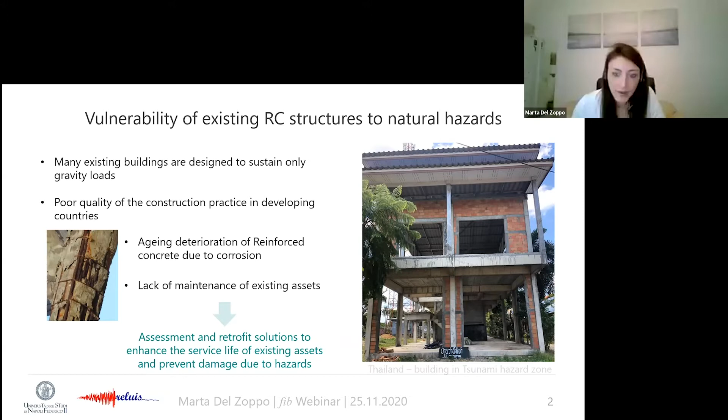In general, natural hazards become disasters when there are human life losses. If we look at the latest reports of the United Nations Office for Disaster Risk Reduction, we see a significant increase in the frequency of natural disasters and related human losses and economic losses. These numbers are almost doubled with respect to the previous period, an increasing rate that is worrying.

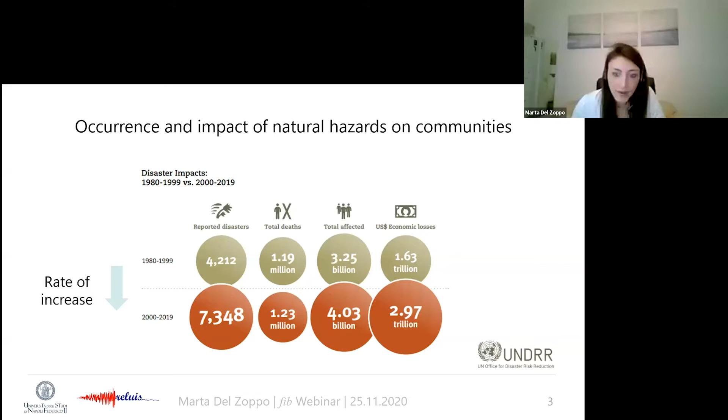The frequency of this kind of event is going to increase. The last example we saw a few weeks ago in Turkey, with a 6.6 magnitude earthquake followed by tsunami, a coastal flooding with a maximum elevation of 1.9 meters. These kinds of events are going to happen, and our structures are not completely safe from such events, because several losses occur during these disasters.

We also live in a historical period of fast changes caused by climate change, as previous speakers were also saying. Climate change is increasing the vulnerability of our structures and also the exposure to natural hazards because of increasing rates of disasters or events like hurricanes, cyclones, storm surges, and tsunami.

The global warming that is causing sea level rise will also increase the risk of coastal flooding due to storm surges and tsunami. This, combined with increasing carbon dioxide concentration in our atmosphere, higher temperature, and higher humidity, will also increase the rate of corrosion of our existing reinforced concrete structures, and so increase their vulnerability in general to these risks.

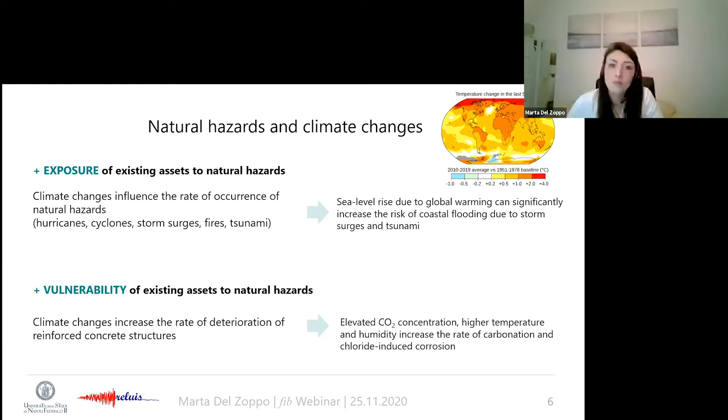In addition to natural hazards, we need also to consider that we have many induced hazards. One of the most famous examples is the Groningen gas field, where there is a phenomenon of induced seismicity in that area given by the gas extraction.

Another example is about the potential induced seismicity and tsunami triggered by offshore activities near seismogenic faults. This was the objective of the SPOT project in Italy, where several spot areas were identified along the Italian coast - areas at potential risk of earthquakes and tsunami due to offshore activities.

In general, we need to define a life cycle procedure for assessment and retrofit of existing structures, looking for single and multiple hazards. During the assessment, we need to consider the degradation of materials that can occur during the life cycle, given by corrosion for instance. A proper assessment of the behavior, performance, and damage of the structure will allow for good design of retrofit intervention, prioritization of intervention from a risk perspective, and retrofit strategies that extend the service life of our structures.

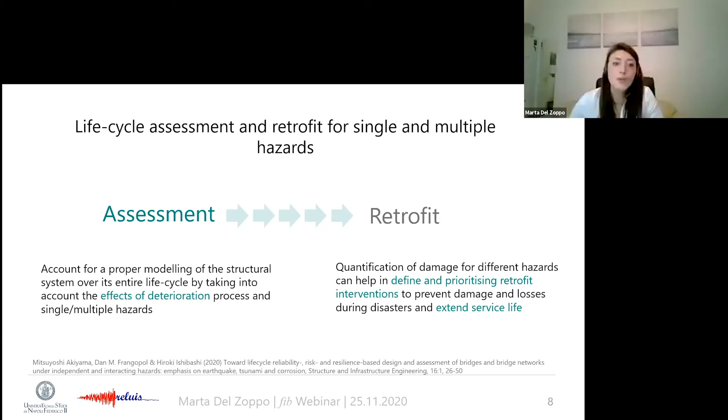In this context, there are two pillars we need to consider: resilience and sustainability. Resilience of our communities to natural hazards is paramount to guarantee that our communities, focusing on the physical part of the community, meaning buildings and structures, are able to recover after the event.

We need to avoid damage and allow the full recovery of activities in the shortest time possible. We also need to consider the sustainability of the intervention. If there's need to recover the original damaged buildings, we need a sustainable approach, considering the sustainability of materials adopted, and the management of debris, which can become a real issue in such conditions.

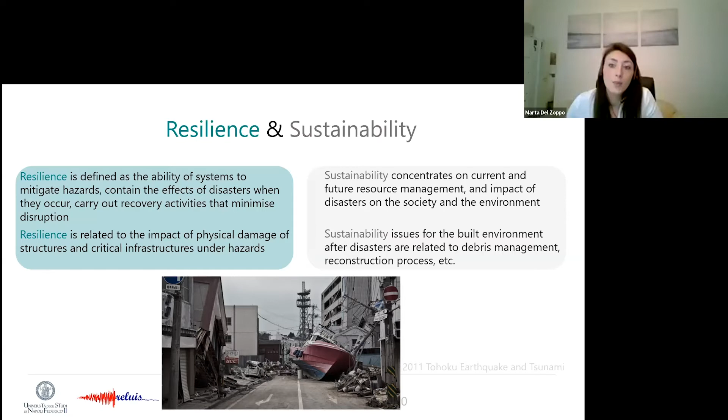Among other hazards, earthquakes are the most frequent, as seen from the United Nations report, and are the most dangerous for the built environment, for structures. But the major concern is that earthquakes can be a trigger for many other hazards, such as landslide, fault displacement, and tsunami, which we have seen are more destructive for both the built environment and human lives. I will focus on these two in the rest of this presentation.

Seismic hazard and earthquake engineering in general are very well developed and quite well understood nowadays, while other kinds of hazards are less investigated and can represent a major threat for our communities and built environment. In the field of seismic assessment, experience acquired in the aftermath of previous earthquakes allows us to be aware of the critical deficiencies of our existing reinforced concrete structures during earthquakes, even of moderate intensity.

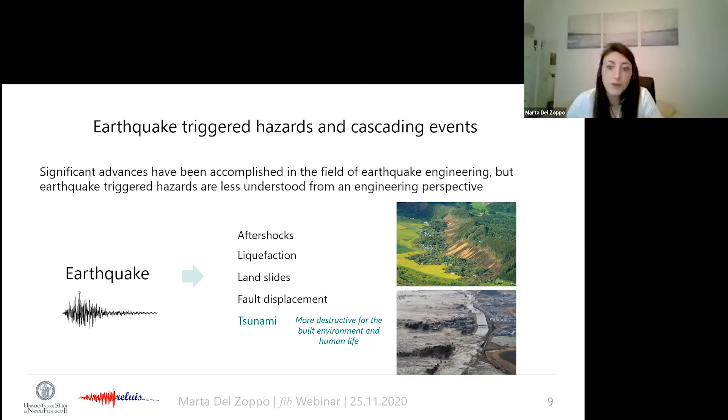In terms of damage to structural components, the most critical parts are related to beam column joints, but also to the lack of detailing, which translates into low shear capacity and limited ductility of beams and columns, among many other problems related to shear walls and other structural elements.

Damage is also concentrated in non-structural components, which are the major cause of economic losses after earthquakes of minor intensity. It can also be a threat to human life, especially when cladding can overturn during earthquakes and become a danger.

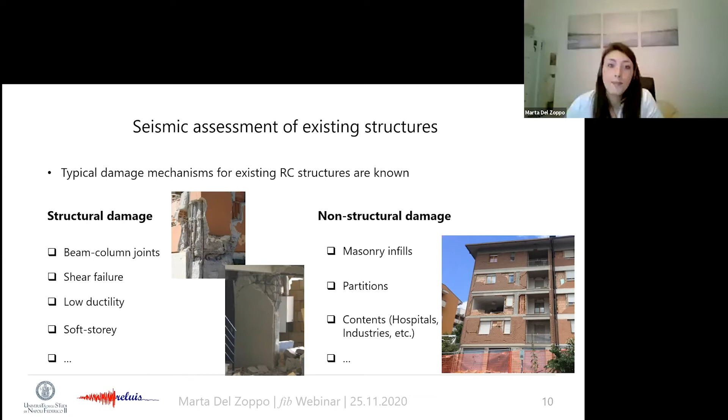We know so many things about earthquakes and how structures respond to such events, and we have several tools to predict with good accuracy the behavior of structures when subjected to earthquakes. But what about tsunami? Tsunami engineering is a quite brand new, relatively recent field of research, and the knowledge about the behavior of structures under this kind of hazard is quite low.

When we approach other kinds of hazards different from earthquakes, we need to consider that the performance of structures can be completely different in fundamentals, so we need to start basically from the beginning. Tsunamis are a sequence of waves characterized by a very long wavelength period, typically ranging between 20 and 40 minutes.

After the first phase of impulsive bore, the tsunami flow becomes similar to a quasi-steady flow. Under this kind of quasi-steady and long duration load, the behavior of structures is not dynamic. This kind of external loading does not excite the dynamic response of a structure, given the difference in fundamental periods. So the behavior and performance of structures subjected to tsunami is static in nature, monotonic under the inflow inundation, and controlled by the lateral force given by the tsunami on the single structure or building.

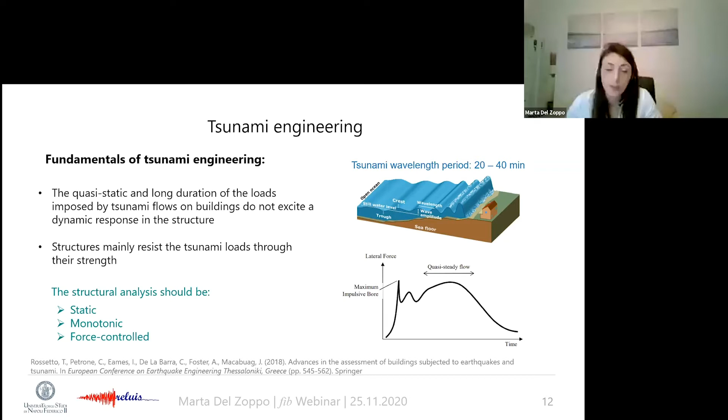To understand more about the behavior and performance of structures during a tsunami, we can start by analyzing the effects induced by previous tsunamis on structures. In general, tsunamis are very complex phenomena that induce several kinds of loads and effects on structures.

We have lateral loads given by hydrostatic and hydrodynamic pressure that may have higher magnitude at the lower stories of a building. These loads cause failure modes in terms of mechanisms, like development of plastic hinges at the columns of the ground story level, but can also cause shear failures locally on ground story columns, and of course damage to masonry infill walls and partitions.

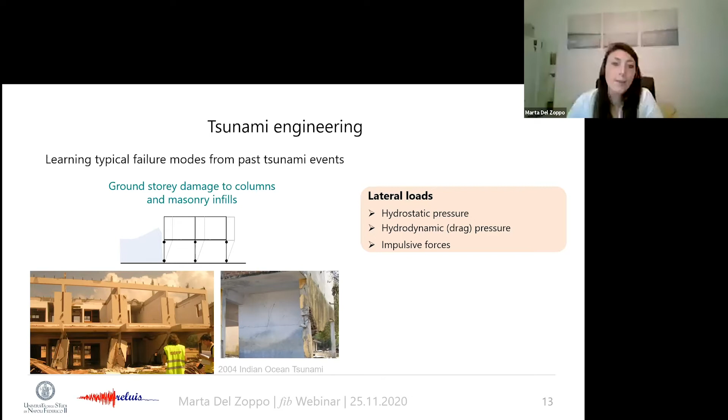But tsunamis also induce vertical loads in the form of uplift loads due to buoyancy of the enclosed space submerged in the fluid, because we are talking about this flow of seawater, and buildings that are impermeable or with very small openings can be affected by buoyancy on the foundation caused by this large enclosed space inside the building. This kind of effect can lead to a failure mode like global overturning of the structure, especially when shallow foundations are adopted.

This was the failure mode typically observed in Japan during the 2011 Tohoku earthquake and tsunami, because of the traditional construction technique in Japan, where they use as structural components exterior claddings made by lightly reinforced concrete walls. So basically the structures were like boxes, reinforced concrete boxes, submerged in the tsunami flow, and then they overturned in many circumstances.

Other effects related to tsunami are also caused by the soil. This phenomenon is called scour, which is soil erosion below the foundation of the building, causing local loss of support of the column, which can be a trigger for partial collapse of the structure.

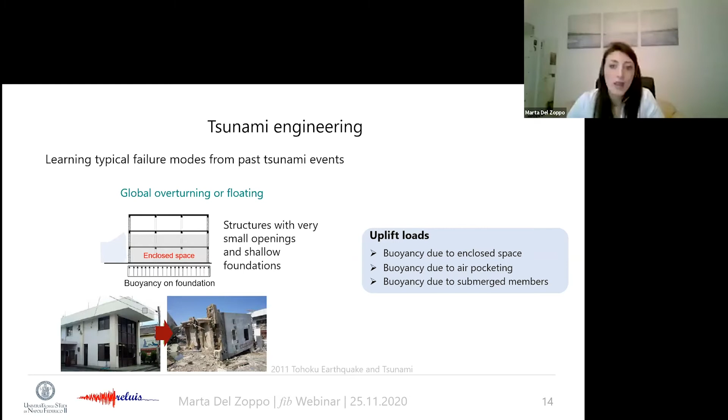And also the impact with floating debris. Several debris are transported by the seawater, especially near seaports, but in general, ship containers can be transported by the water and can cause significant damage to structural elements, and also in this case lead to local failures.

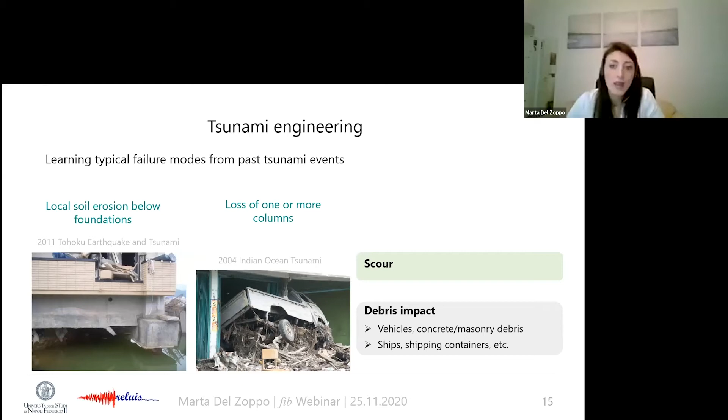So based on the lessons learned from past mega tsunamis, a performance-based assessment methodology has been developed for this kind of hazard. Starting from a hazard map, we can assess which kinds of loads are acting on a structure, and then define which is the predominant failure mode for the building.

Of course, in this assessment procedure, we also need to consider the effect of pre-existing damage due to corrosion, always looking at the entire life cycle of the structure, damage occurred by preceding earthquakes in the case that the tsunami is triggered by a previous seismic event, and also whether any kind of retrofit intervention has already been applied to the structure to prevent seismic damage.

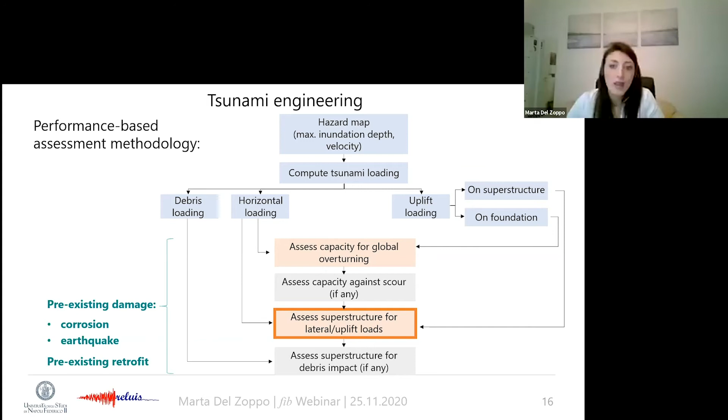Next, I will focus on this structural typology that is very widespread in the Mediterranean region, but also in many other countries in the world: reinforced concrete frame structures with unconfined masonry infill walls.

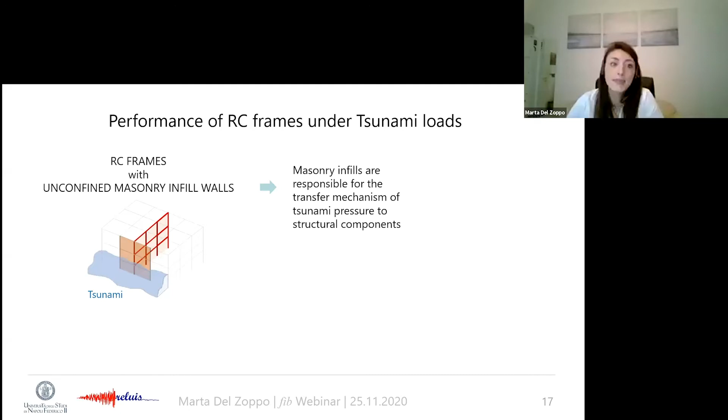These kinds of structures, when subjected to tsunami, have their response and load transmission mainly governed by the exterior claddings, which in this case are made by masonry infill walls. But under such out-of-plane loads, the lateral pressure induced by tsunami on these masonry infill walls will cause the out-of-plane failure of such systems.

So this kind of wall is called a tsunami breakaway wall, because it will collapse very soon during the tsunami inundation, allowing the water to pass inside the building.

And for this kind of structural typology, we developed a structural analysis methodology. Given the fundamental difference between tsunami engineering and earthquake engineering, we need specific structural analysis methodology to design and assess the performance of structures during this kind of hazard.

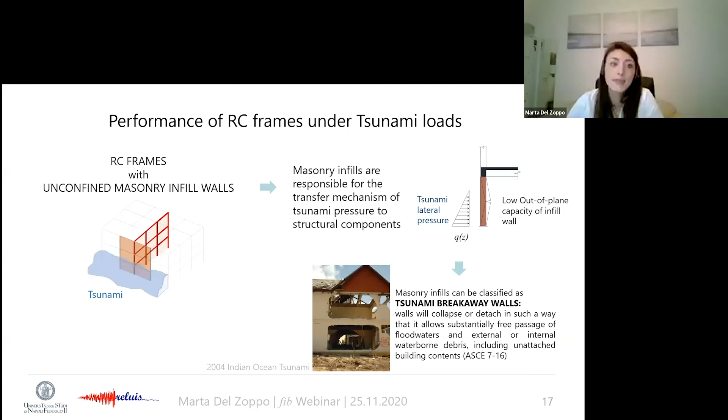In the context of tsunami engineering, the main methodology is the variable depth pushover analysis, the VDPO analysis, which has been developed by Petrone et al. in 2017 and is now adopted by the American Design Code for tsunami evacuation buildings.

This methodology has been further improved in recent years in our recent collaborations to include also the effect of breakaway infill walls and also the effect of uplift loads on structures. So basically, the variable depth pushover analysis for breakaway infill frames, the VDPO-BI analysis, is a nonlinear static pushover analysis that considers, step by step, an incremental increase of tsunami inundation depth.

By increasing the inundation depth, analysis will consider the progressive damage of non-structural components, so the failure of infill walls, for instance, under the lateral pressure of the tsunami, and will apply to structural elements, both vertical and horizontal components of the structure, the actual distribution of loads caused by the tsunami.

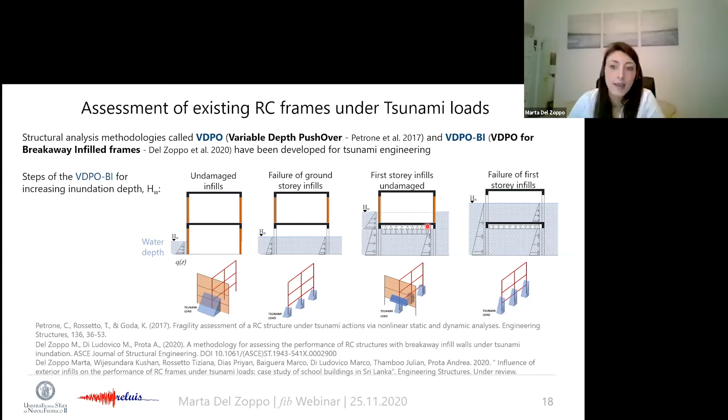Now we see an application of the VDPO analysis, VDPO-BI analysis, for a three-story frame. We want to assess the capacity of this structure, assuming that the tsunami demand at the building location is known.

So we know which tsunami force is expected at the building site and also the maximum inundation depth. Thanks to the VDPO-BI analysis, we can define the capacity curve for the structure, like we do during seismic assessment, assess the damage to structural and non-structural components during the inundation, and also check if the structure is able or not to sustain the tsunami demand at the specific location, given this specific kind of tsunami inundation scenario.

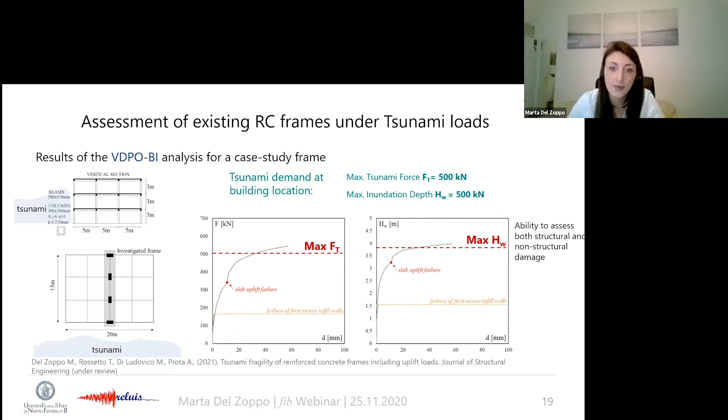When we have a methodology and tools to perform a refined assessment of the performance of structures, then we are able to design retrofit interventions that can avoid the damage of such structures, in the optic of sustainability.

Sometimes retrofit is not a viable choice, and we don't have any other alternative except demolition and reconstruction. But in the perspective of sustainability, we always try to reuse existing structures and adapt their performance to our current standards.

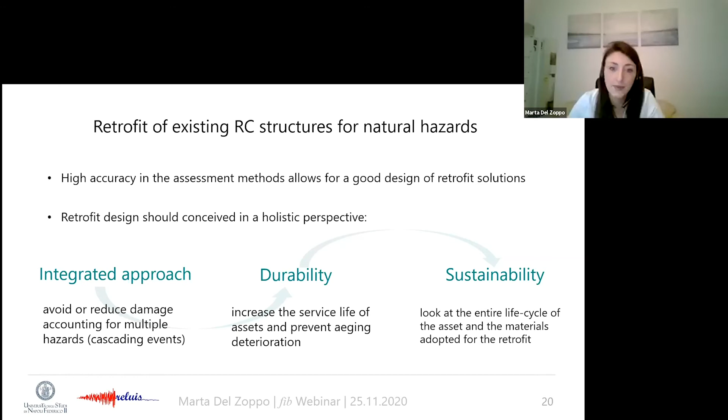Retrofit systems for reinforced concrete existing structures address a lot of different structural needs, and most of them are very well known in construction practice, and their effectiveness has been proved and well assessed, including by past events.

Like this picture taken after the Central Italy earthquake in 2016, where we can see the effectiveness of the FRP strengthening of this part of the building that is still standing after the earthquake.

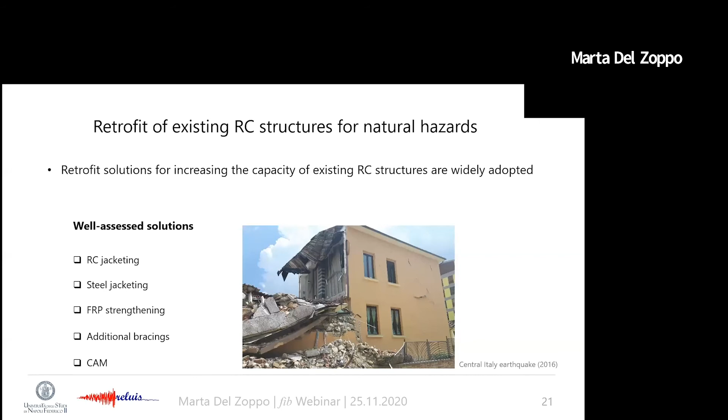Research is also currently focusing on developing new technologies that, other than responding to the safety level by increasing the capacity of members, also look at other aspects of durability and sustainability.

In this perspective, we are working on the adoption, for instance, of inorganic composite materials that can sometimes be more sustainable given the low amount of polymers inside the matrix, like high and ultra high performance fiber reinforced cement composites.

In this case, I will not say much more on this aspect because I already discussed this technology during a previous FIB webinar that you can now find on the YouTube channel of FIB.

And there are also other kinds of retrofit solutions with inorganic composite materials, like FRCM technology, TRM, and so on. And we have also a new trend.

New research is now looking at the adoption of smart materials, like, for instance, shape memory alloys for strengthening and retrofitting existing structures. We had a webinar on this topic a couple of weeks ago, so if you're interested, you will find the video on the YouTube channel in a couple of weeks.

Seismic retrofit solutions are well known, and they are used both for increasing the capacity of structural components like beams, columns, shear walls, and beam-column joints, using different solutions and technologies.

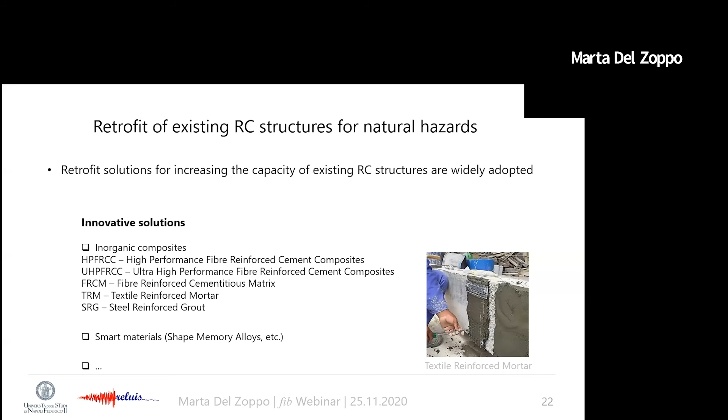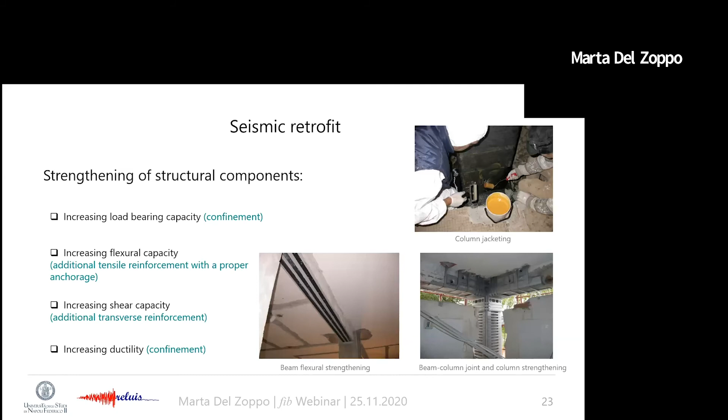They are also adopted commonly for preventing damage to non-structural components, so strengthening infill walls both in their in-plane direction and also to prevent out-of-plane overturning failure, which also avoids danger for human lives.

Retrofit solutions for other kinds of hazards are less investigated, less known, but definitely we can say that they can exist, and we are working on this too now, looking at extending the perspective of retrofit also to other kinds of hazards.

When we talk about tsunami, the current and most diffused approach is a large scale countermeasure against tsunami. It consists of adopting physical barriers like seawalls or mangroves that dissipate the energy of the tsunami offshore, decreasing the velocity of the inundation depth and flow when it arrives on shore, making it less destructive when it reaches coastal communities.

But retrofit solutions at the single building level can also be developed and tailored.

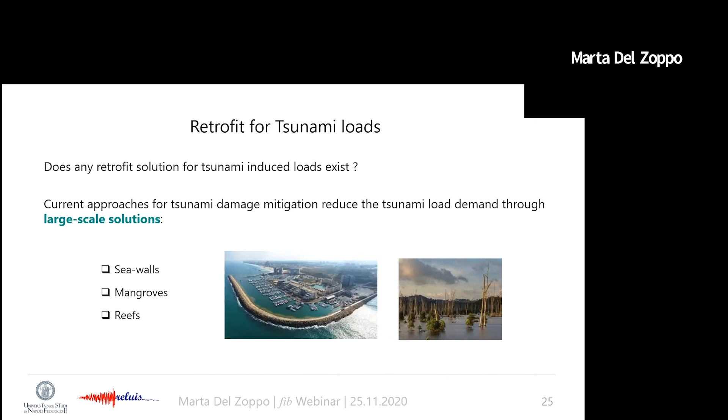Of course, the adoption of retrofit solutions can definitely be adopted for critical infrastructures like hospitals, for instance, or for buildings that can be adopted as tsunami vertical shelters, and also, of course, for those buildings that can be considered as having cultural heritage value and so need to be saved for future generations.

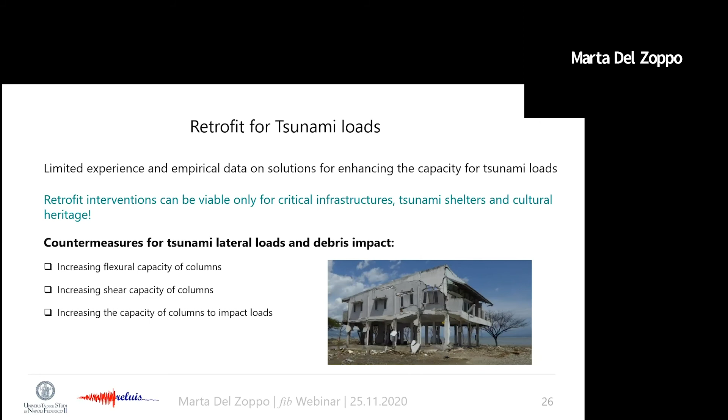So here are some examples of which kind of intervention can be needed for tsunami loads. We can strengthen the columns and the elements at the ground story level to avoid damage from lateral loading and from debris. But we can also think of systems to avoid damage caused by buoyancy, in this case with breakaway slab systems, for instance, or with the adoption of deep foundations, so to avoid the effect of overturning observed in previous tsunamis.

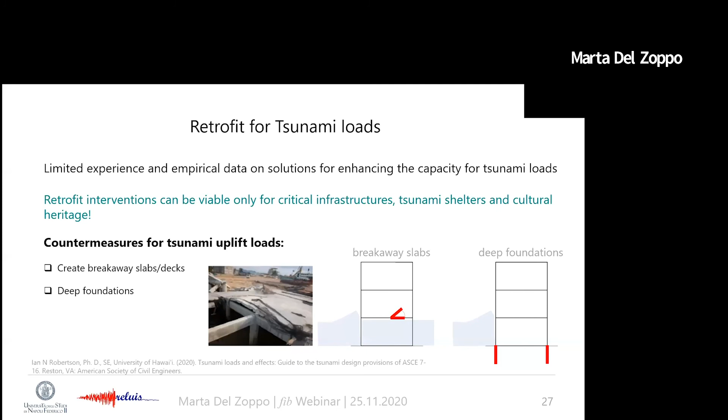And also intervention on the foundation can be helpful in the case of damage due to scour, so preventing soil erosion or avoiding local collapses, also increasing the redundancy of the structure when it is possible.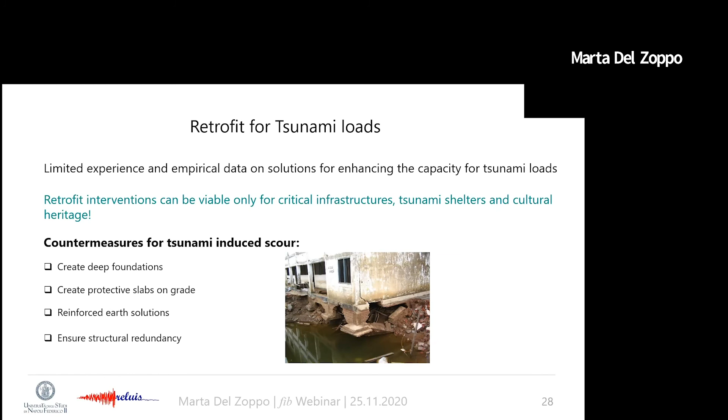In general, when we design retrofit solutions, we also need to think of the effect that kind of retrofit solution will have on sequential events. So in the case of earthquake followed by tsunami, we need to consider that any kind of intervention that we do for seismic strengthening will affect also the response under tsunami.

And this is an example, for instance, of a bridge that was strengthened to resist earthquakes. The piers were jacketed in this case, and after the 2011 tsunami, the pier was completely undamaged. So basically, this strengthening solution designed as a seismic intervention actually helped also during the tsunami event. And also the use of jackets with materials that can enhance durability will be helpful during a tsunami.

Because, of course, if you consider reinforced concrete members that will be completely submerged in seawater, they will be subjected to a faster rate of corrosion and degradation caused by this stronger attack of chlorides given by the seawater.

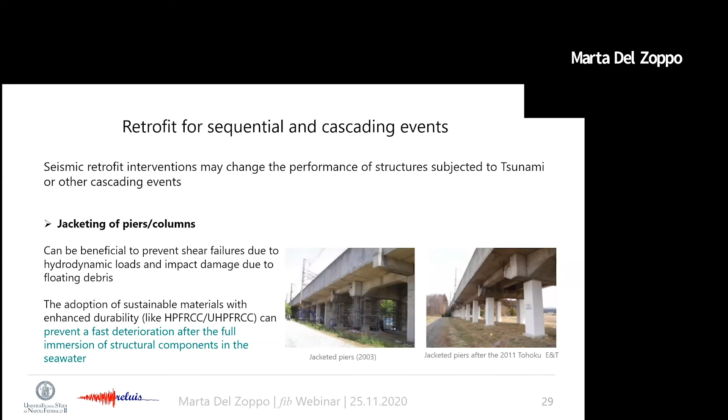And also in terms of strengthening out-of-plane non-structural components like the infills, preventing out-of-plane failure of the infills can be important, especially for critical infrastructures, structures with valuable contents, and also shelters. It will also reduce the generation of debris, which is another issue we've seen.

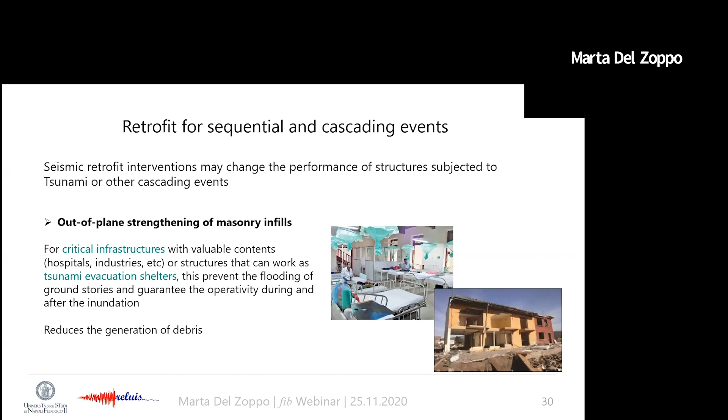The management of debris is also another aspect to be considered. But we should also be careful because sometimes this can be detrimental, because if we remember that the loading acting on structures is a function of the surface exposed to the flow, to the water, the adoption of systems that prevent failure of the infill walls will make our structure like waterproof. And so in this way, we will increase the loading acting on structural members.

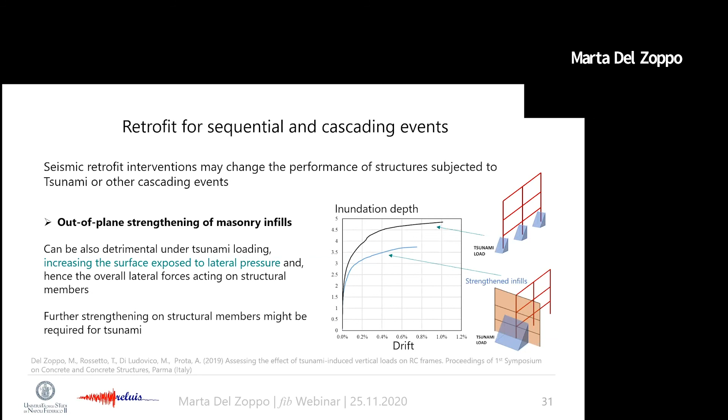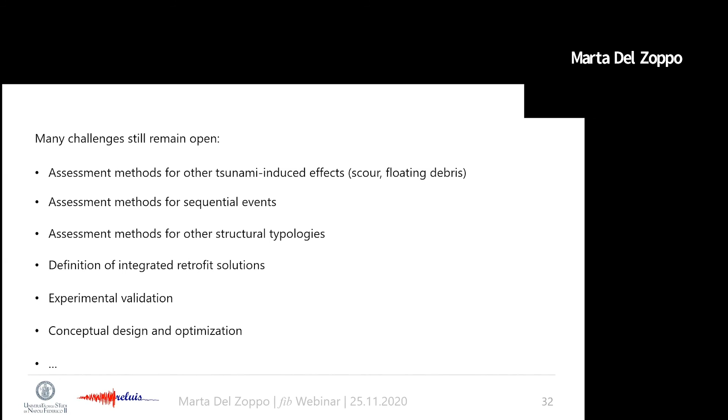Of course, this field needs to be further explored, and many challenges related to tsunami and also other kinds of hazards still remain open, both regarding the assessment and also the retrofit. So if you have any idea or proposal for discussion, please feel free to ask questions or to contact me.